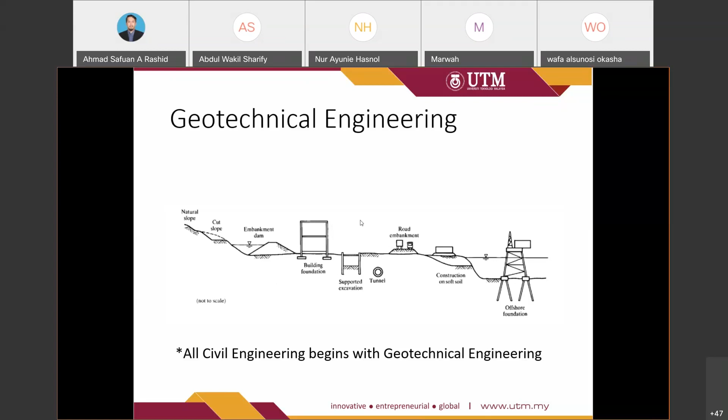So this is a typical geotechnical project, where we are provided with land to construct any structure on top of the ground. So the most important thing as a geotechnical engineer is we need to get all the related information, especially on the soil properties. So what do we need? For example, strength, stiffness, and also consolidation.

So in order to get all this information, we carry out site investigation at the site, and then we bring all the samples, either undisturbed or disturbed, to the lab and conduct all the required tests. From there we gain all the soil properties, and from the soil properties we can carry out the design.

So now, for example, if the problem is very complicated,

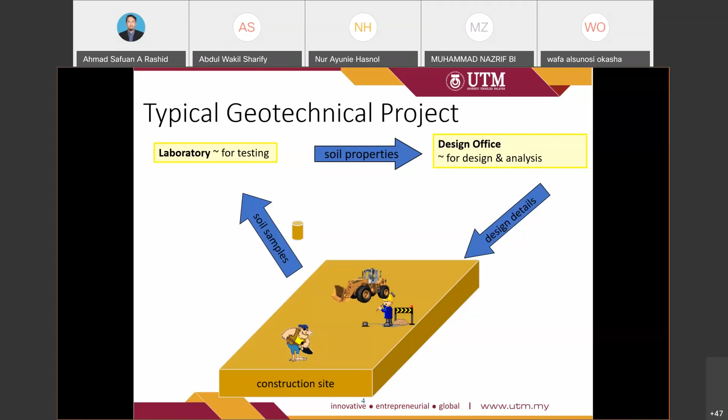So for a geotechnical engineer or a structural engineer, these are the two most important things that should be considered. We need to make sure that in our design, the building or structure is able to provide good serviceability and also prevent any failure. For serviceability, we may discuss the SLS, serviceability limit state approach, while for failure, normally we discuss the ultimate limit state approach.

So for example, logically, if we satisfy the ULS, definitely we may prevent the soil from collapsing. However, if we do not satisfy the SLS, most probably there will be no problems with the structure in terms of failure, but we will not feel comfortable to stay or live inside a building that has a lot of cracks. I guess nobody in the world will buy a new house with a lot of cracks.

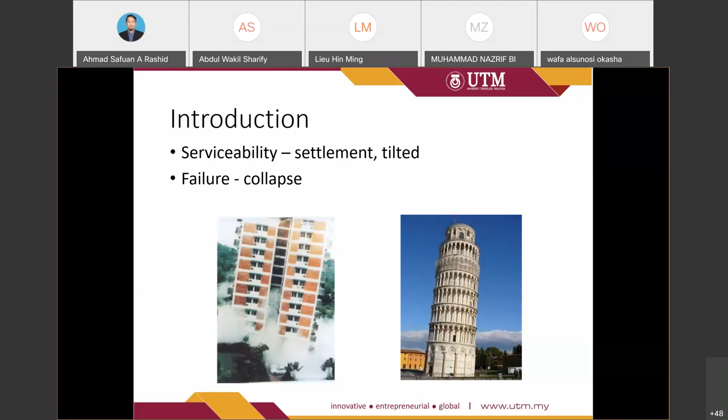So traditional soil mechanics and geotechnical engineering design was predominantly concerned with soil strength and stiffness, so that the design engineer could define the failure state of the soil or control excessive deformations of the soil structure. Strength we can get, for example, if we carry out a triaxial test, or unconfined compressive strength as a simple one, so we can get the strength of the material.

In order to get the stiffness, we may divide the strength by the strain. That means what is the allowable strain before the soil starts to fail. So that is related to stiffness. So we need to make sure that the movement should not be greater than the allowable strain. Okay, so for excessive deformations,

Is it on? What does it mean? Who was that, miss? Is it on? Nothing. Okay. Why can't you see my slide? Assalamu alaikum, Professor. Actually, we can see the slides, but the first time I joined I could not hear the sound, so I had to disconnect and join again. Okay. So now Mr. Rian Lim is texting that he cannot hear the sound, so I told him to just rejoin the meeting. Okay, you need to rejoin. Might be that will help. Actually, I'm recording this lecture, so after the class I will give the recorded file.

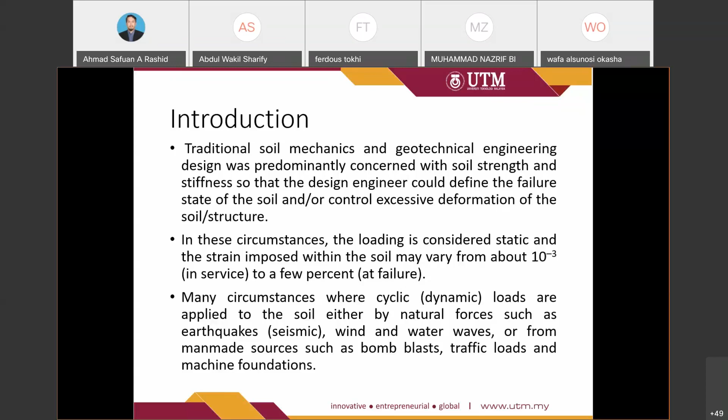So the type of dynamic loading in soil or the foundation of a structure depends on the nature of the source producing it. The dynamic loads vary in their magnitude, direction, or position with time. So we need to identify the value, the magnitude, the direction, and at what time it normally arrives.

So there are several types of dynamic loads. We call one periodic load. It's a special type of load that varies in magnitude with time and repeats itself at regular intervals. For example, operation of reciprocating or rotary machines. So this is related to a machine, where they provide a vibration at regular intervals.

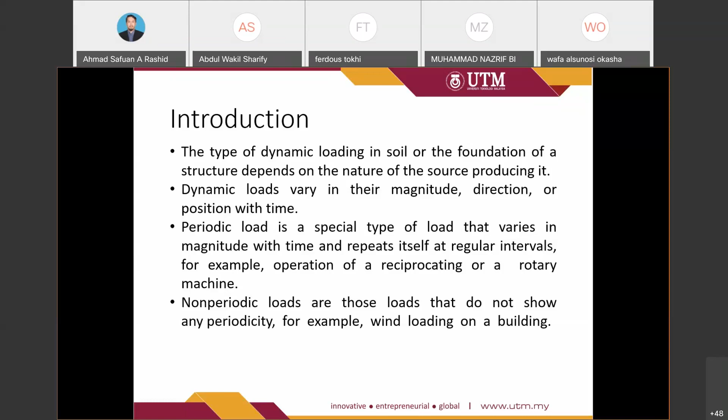Okay, non-periodic loads are those loads that do not show any periodicity. For example, wind loading on a building. They still provide what we call dynamic loading, but it's not very sure when the load will come, the frequency of the loads.

So we have deterministic loads. Those loads can be specified as a definite function of time, irrespective of whether the time variation is regular or irregular. For example, the harmonic load imposed by unbalanced rotating machines. So this is due to problems with machines where they produce harmonic loads.

Okay, non-deterministic loads are those loads that cannot be described as a definite function of time because of their inherent uncertainty in magnitude and form of variation with time. For example, earthquake. We cannot determine accurately when this type of load will come. The seismologists can estimate, but they cannot predict accurately.

So cyclic loads are those loads which exhibit a degree of regularity both in magnitude and frequency. Okay. So it's more related to how the loads have a tendency to

There is no sound? Anyone have a problem with the sound? Hello? I'm okay. Where do you stay? Ode, is Ode your name? Yeah, because I give the lecture from UTM, so I guess there will be no problem in terms of internet connection from my room. Okay. Maybe you have a problem with your own internet connection.

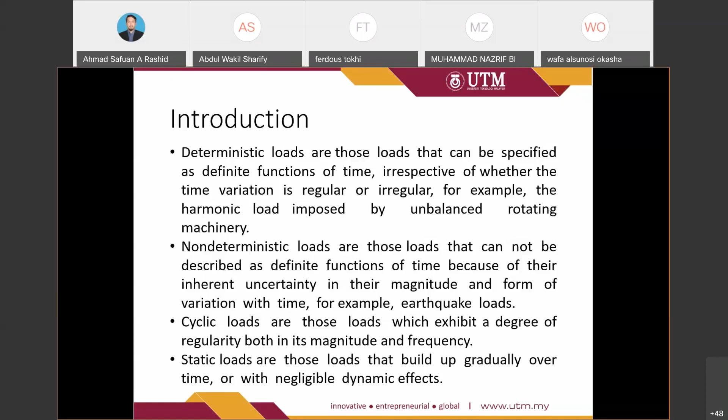Okay, so this is an example of types of dynamic loads. The first one is a low speed rotary machine. So they have a certain cycle there. They show a sinusoidal type. For example, for the left side, for the right side.

Okay, here they show sinusoidal patterns. And the thing we have here is a single impact of a hammer and vertical acceleration due to pile driving. So this is the effect of pile driving during pile installations. They drop a hammer and then the hammer hits the top, the pile cap, the top of the pile, the pile shoe. So then they produce this kind of

signal result. And the last one is from the accelerogram of an earthquake, which they measure in gravity, which shows the pattern of the earthquake within 26 seconds. So it means that all the cyclic loads are related to cyclic loading under a certain period of time. Compared to static, it doesn't have any cycle. Either it can gradually increase with time, or it will maintain a certain value.

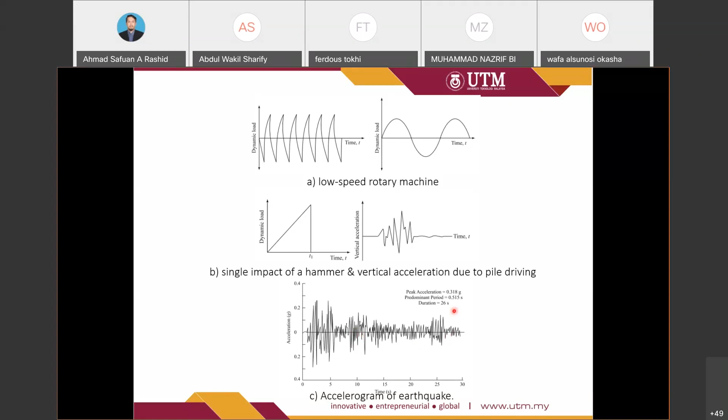So the magnitudes of these dynamic loads are generally much smaller than most static loads and generate strain within the soil as low as 10 to the power of negative 6. It's a very small strain. And in terms of the magnitudes, we do not compare to the earthquake. We just compare, for example, from a machine. So it's less than the normal static.

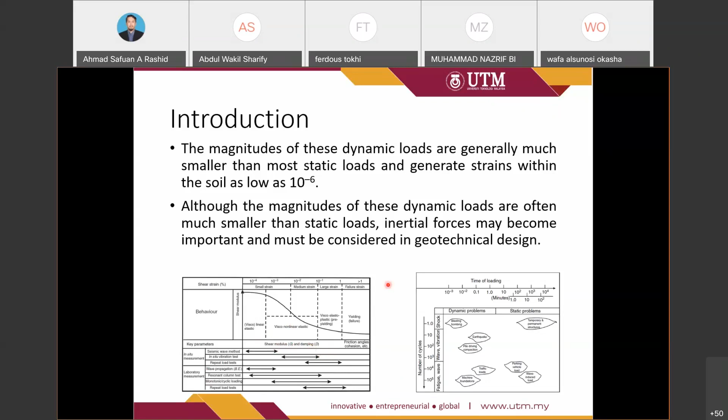So a simple analogy. For example, if you are a passenger in a car and suddenly the driver brakes the car suddenly, you may feel that you are moving forwards. So that is an example of inertia. Newton's first law says that objects do not accelerate spontaneously. This property of matter which causes objects to resist acceleration has been named inertia. So Newton's first law is often called the law of inertia. So that is the definition of inertia.

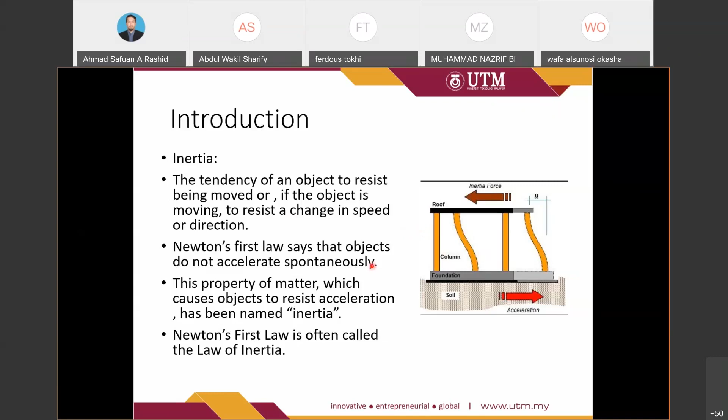Most civil engineering structures involve some type of structural element in direct contact with the ground. When we design a building, the building itself is called the superstructure, while beneath the ground there is a substructure, normally called the foundation.

When an external force such as an earthquake acts on this system, the structural displacement and the ground displacement are dependent on each other. Even though the foundation structure and the supporting soil are two different physical entities, they form a system, or in terms of the mechanics of behavior, one component influences the behavior of the other, the end product being the result of this mutual interaction between the two.

When an earthquake event happens, the ground starts to displace first, and this movement causes an interaction between the ground and the structure. This is the essence of soil-structure interaction. Due to the movement of the ground from the earthquake, this movement starts to shake or vibrate the building, and so there is an interaction between soil and structure.

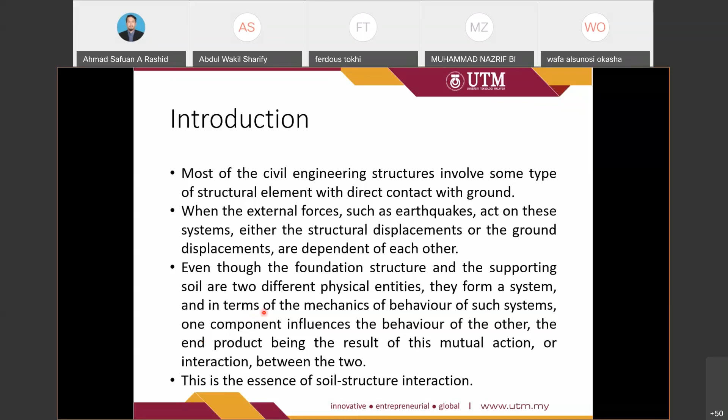The process in which the response of the soil influences the motion of the structure, and the motion of the structure influences the response of the soil, is termed soil-structure interaction.

Conventional structure design methods neglect SSI effects. Neglecting SSI is reasonable for light structures on relatively stiff soil, such as low-rise buildings and simple rigid retaining walls. In common conventional design, we normally don't include the SSI approach or SSI effects, especially when designing light structures or low-rise buildings. They also mention stiff soil - for example, if it's stiff or dense soil, there are no problems designing without considering SSI effects.

The effect of SSI, however, becomes prominent for heavy structures resting on relatively soft soil, for example nuclear power plants, high-rise buildings, and elevated highways on soft soil. There are two things here: first, if the structure is very big or high and sensitive, such as a nuclear power plant, we are not allowed to have any cracks in the structure, because it may lead to nuclear contamination problems.

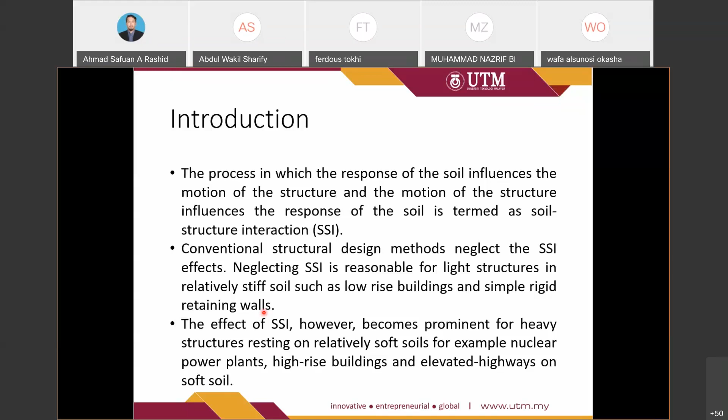Damage sustained in recent earthquakes, such as the 1995 Kobe earthquake, has also highlighted that the seismic behavior of a structure is highly influenced not only by the response of the superstructure but also by the response of the foundation and the ground as well.

Based on this, during the 1995 Kobe earthquake, they noticed the importance of integrating the interaction between soil and structure in the design, in order to reduce building failure. Modern seismic design codes, such as the Standard Specification for Concrete Structures, Seismic Performance Verification JSCE 2005, stipulate that the response analysis should be conducted by taking into consideration the whole structure system, including superstructure, foundation and ground.

So they came to a wise conclusion, proposing a seismic design code which considers these SSI effects.

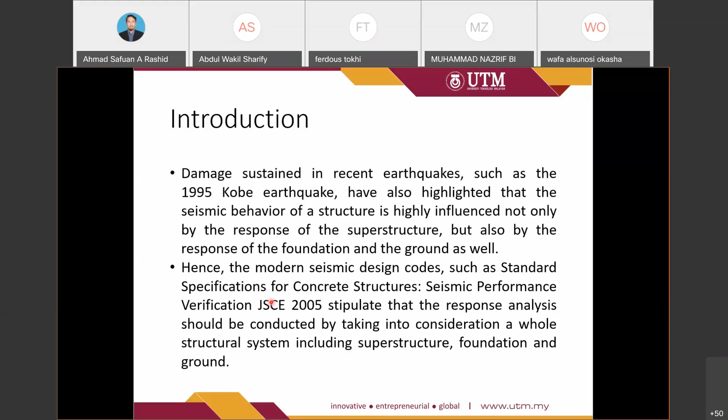The process in which the response of the soil influences the motion of the structure, and the motion of the structure influences the response of the soil, is termed SSI, soil structure interaction.

Stiffness relates increment of stress to increment of strain. A knowledge of soil stiffness is required to calculate ground movement and to obtain solutions to problems of soil structure interaction, such as loads on retaining walls.

I guess most of you have experience using a commercial software, especially for geotechnics, like Plaxis. We need to include all the information on strength and stiffness when we run any analysis. If you choose to run a seismic analysis, we need to include the shear modulus or damping ratio values in the design.

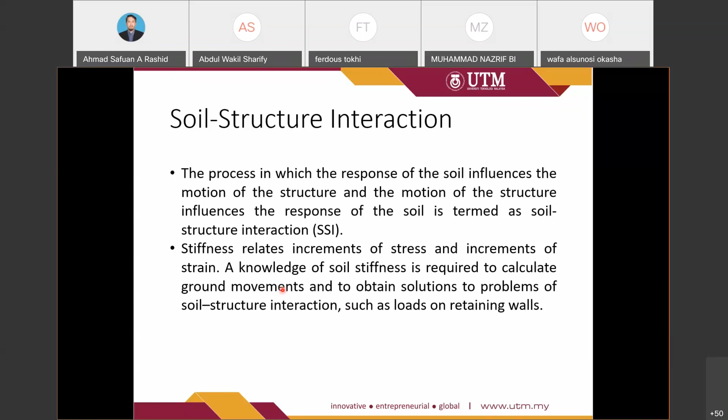That's why when I did my PhD in the UK, there was one guy from Thailand who studied the effect of shredded tire to reduce the effect from vibration. They mix the soil or have a layer of shredded tire, which acts as a damping system.

For example, if we treat the soil well, the magnitude of the wave will be reduced before it starts to transmit to the structure. This means that if we treat the soil well, we could reduce the cost for the foundation. This phenomenon is called dynamic soil structure interaction, and is recognized as being very important for seismic design of structures.

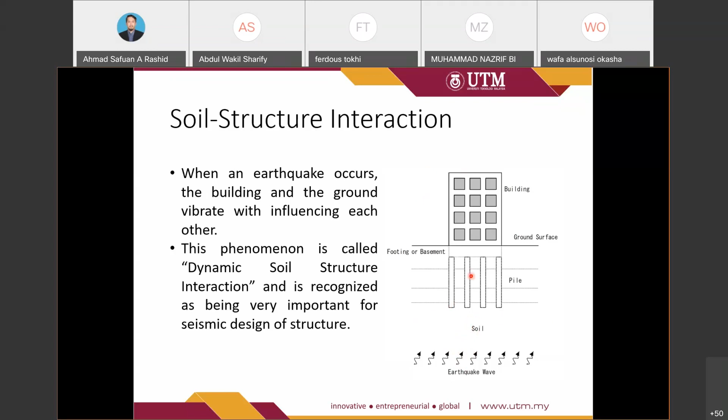When we discuss soil structure interaction, the most important structure is the substructure itself, because the source of the vibration is from the soil, which transmits to the substructure, and later goes up to the main building or superstructure.

The role of the foundation under static or normal conditions is supporting the dead weight and the live load of the building, transmitting this load to the ground - from the slab to the beam, to the column, and to the foundation. That is the role of the foundation.

During an earthquake, the foundation transmits the ground motion to the building, and bears the building vibration, transmitting it back to the ground. It means that when the source of the earthquake is beneath the foundation, it transmits the ground motion to the building, then bears the building vibration and transmits it back.

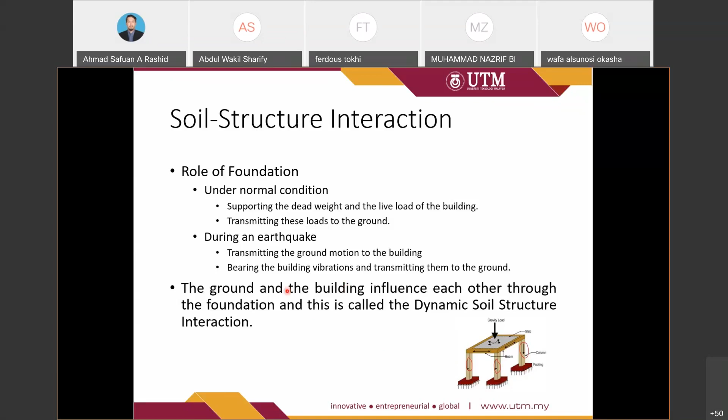Because the earthquake is a wave, or a cyclic loading, it can transmit from the ground to the top of the building via the foundation. The ground and the building influence each other through the foundation, and this is called dynamic soil structure interaction.

The degree of influence of SSI on the response of a building depends on the stiffness of the ground, which is related to the property of the ground itself. For example, a loose sand compared to a dense sand - the loose sand is definitely weaker compared to the dense sand or dense material.

Dynamic characteristics of the building itself, such as natural period and damping factor, also matter for the building and foundation. It depends on its natural period or natural frequency - each structure has its own natural frequency. If the vibration is greater than the natural frequency, there is a potential for the structure to fail. They also have their own damping factor, which can reduce the effect from earthquake vibration. If you have a chance, you can go to Japan.

You can go to Japan and see a building with a lot of what we call a damping system. I used to visit Nagoya, for example, Hokkaido, and I saw a lot of damping systems built into their buildings to resist or reduce the effect from the earthquake.

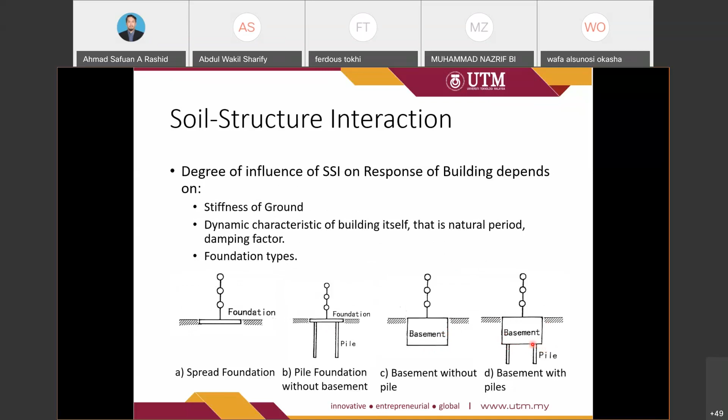And the last one, through the basement surface and the pile, this basement surface and also the pile, so this is a combination of pile and basement. So this is the contact between the ground and the structure.

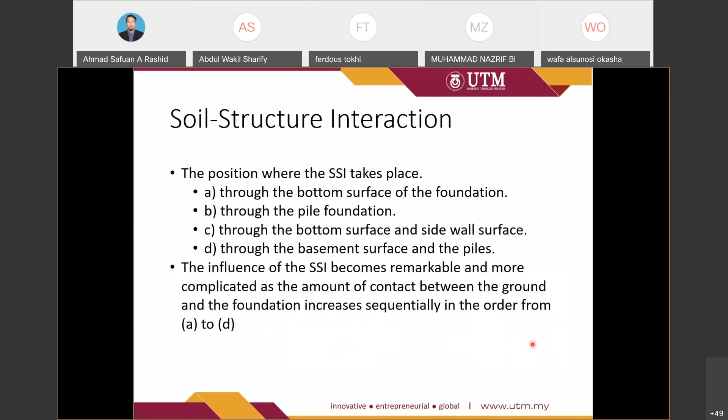The influence of SSI becomes remarkable and more complicated as the amount of contact between the ground and the foundation increases, sequentially in order from A to D. So A is less complicated and D is the most complicated, in terms of analysis or calculations.

So this is an example where a building experiences an earthquake or vibration from the earthquake. Here we have an earthquake fault. So the interaction between ground and structure happens when the seismic wave, denoted as E naught, generated by the earthquake fault, reaches the bottom of the foundation.

When it reaches the bottom of the foundation, it divides into two types: the wave E1 entering into the building, and the wave F0 being reflected back into the ground. So there will be E1 and F0. The wave E1 is called the transmission wave, while the wave F0 is called the reflection wave.

So how do we measure this kind of wave? From the earthquake fault, we can use a seismograph. For the E type, we can use the accelerometer.

For example, if you plan to monitor the health of a building, there's a topic called structure health monitoring. So you want to measure the health of the building, so you may include sensors, for example install an accelerometer on the building, and on the ground install a seismograph, so you can measure what will be the cost after the earthquake or any vibration effect.

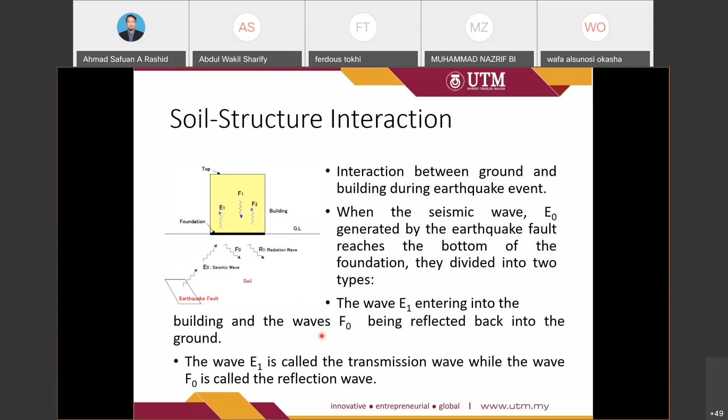Then the transmission wave entering into the building travels towards the top of the building, subjecting the building to vibration. So E1 will move up to the top, and then it will reflect as F1, reflecting at the top and traveling back down to the foundation.

Here a crucial phenomenon occurs for consideration of the SSI. When it moves up to the top, it goes down again, so there are two types of effect, which are F2 and R1. When the wave that is reflected at the top of the building, F1, traveling downward, reaches the foundation, part of it is transmitted into the ground, while the rest is reflected back again and starts to move upward through the building.

This phenomenon will continue until the magnitude of the wave reduces, reducing after a certain number of cycles. The former wave escaping into the ground is called the radiation wave, which is R1.

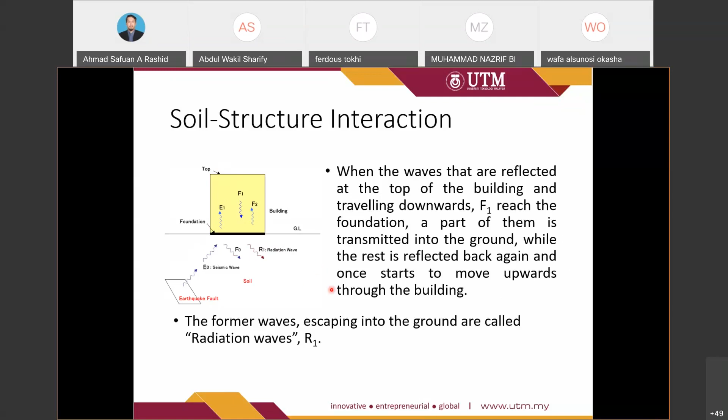Okay, so when the amount of this radiation wave is small, the seismic wave once transmitted into the building and the building continues to vibrate for a long time, the apparent vibration condition becomes the same as the small damping of the building. Okay, the damping caused by the escape of the seismic wave, which has been transmitted into the building, into the ground, is called radiation damping. Okay.

So it means that the building also has a damping system. Okay. So if we can improve the damping system in the building, we can reduce the number of the vibrations. Okay.

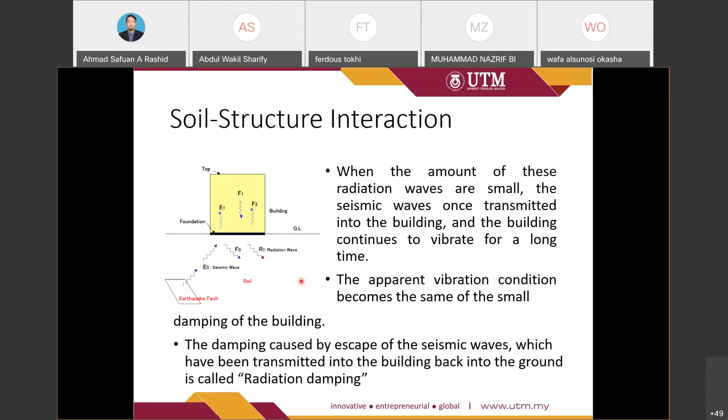So when the building foundation is forced to vibrate vertically, a stress called contact earth pressure is caused at the boundary between the bottom surface of the foundation and the ground. Okay. So this is related to the contact earth pressure. There will be three types of contact earth pressure; the distribution of this contact earth pressure over the bottom surface of the foundation is called the contact earth pressure distribution. Three types of distribution: we have here a rigid foundation, uniform soil classification, and parabolic distribution, where non-linearity is observed. Okay.

So it depends on the type of the material, and also the type of the loading. Okay. So for example, if rigid, normally we discuss what we call normal or static loads. Okay. So we have uniform loads. And then we have a parabolic distribution, which is normally related to a loose material. Okay, so this is the type of the contact earth pressure.

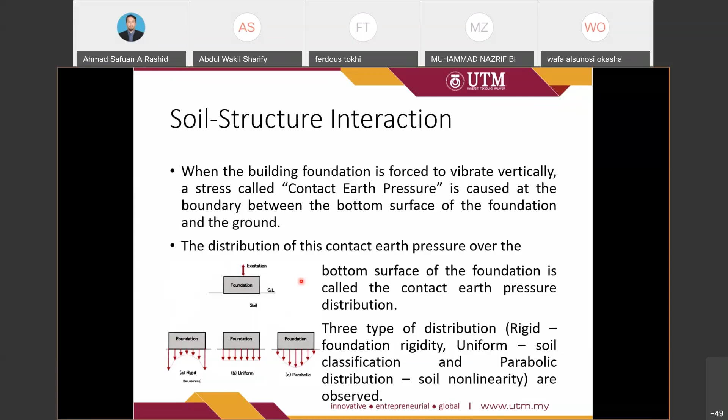Okay, for foundation and substructure solutions with increased complexity, more involved methods of calculating the forces within and displacements of the structure elements are required. The use of more basic approaches that rely heavily on hand calculation or rules of thumb may not be appropriate in such situations, as there may be too many degrees of indeterminacy within the problem, or they may simply be too time consuming to use. Okay, so as a result, the use of finite element models allows the user to create a soil structure model of the whole or part of the problem with relative ease.

Okay, so when I did a reading on this soil dynamics, for example, they still do not have a very comprehensive formula to estimate, for example, the bearing capacity for a shallow foundation, and the author just relies on previous laboratory work in order to calculate, for instance, the bearing capacity for a shallow foundation.

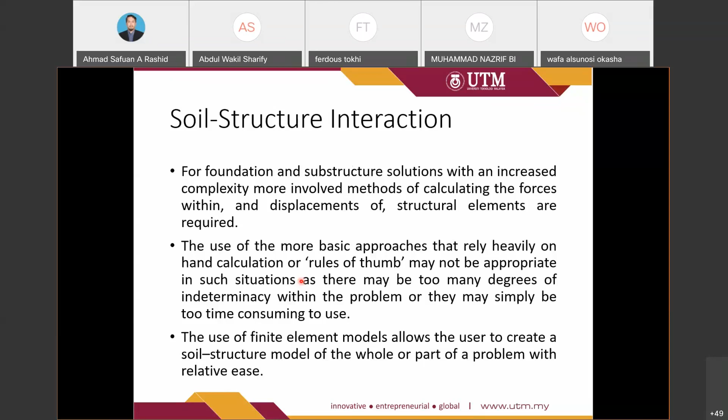Okay. This model can generally then be modified to respond to changes in the design or undertake parametric studies that might otherwise take a great deal of time. So again, when we want to, for example, carry out a parametric study, for example, we want to vary the soil condition or the structure geometry, the author suggested we need to use the finite element method or software.

So soil structure models can also provide us with a means of predicting the impact of one structure on another. Displacement and stress changes can be calculated for different construction phases. Okay. But the important thing is to include what we call the shear modulus and damping values for the soil properties under cyclic loading. Okay.

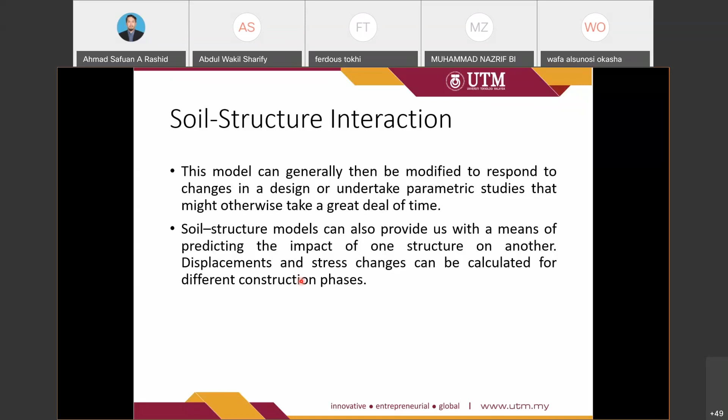Okay. Then we move to wave propagation in soil. So we need to identify what is the pattern or what is the wave that propagates in the soil. Here, I have classified three types of wave which are related to the soil, or the ground itself. For soil, three types of wave are readily encountered and are of importance.

The first two are termed body waves, which are propagated within the soil and comprise the compressional wave and shear wave. So they have two types of wave inside the body of the soil; they call them body waves. So there are two types of wave, which are the P wave and S wave.

So what is the importance of this wave? We can get the value of what we call the shear modulus from either the P wave or S wave, because the shear modulus will be used once we want to carry out the analysis. And at the same time we can determine what we call the layer of the material, the type and condition of the soil, by using this S or P wave.

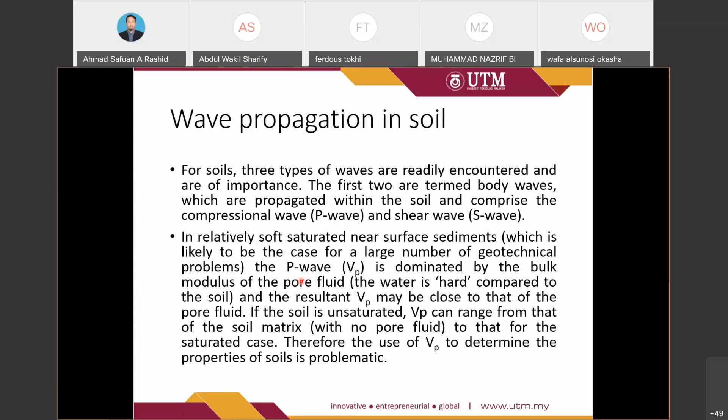However, pore fluid does not carry shear stress, so the velocity of the S wave is only influenced by the soil and not by the pore fluid. It can also be shown that during most dynamic loading events, it is cyclic changes in the shear stress that influence the behavior of the soil. So here we notice that the pore fluid does not carry shear stress, because the water cannot be sheared; the water can be compressed. That's why the water doesn't have any phi value.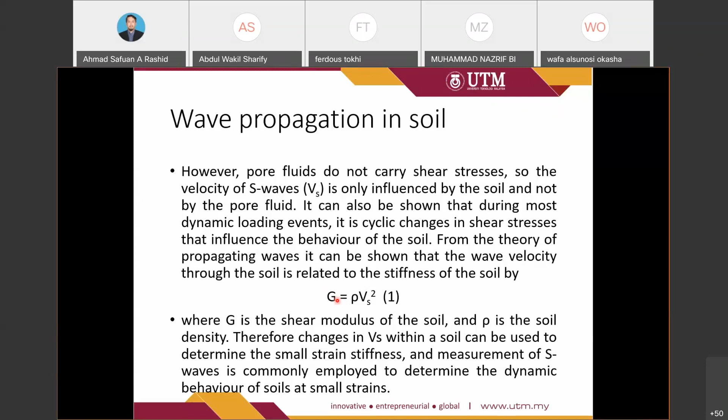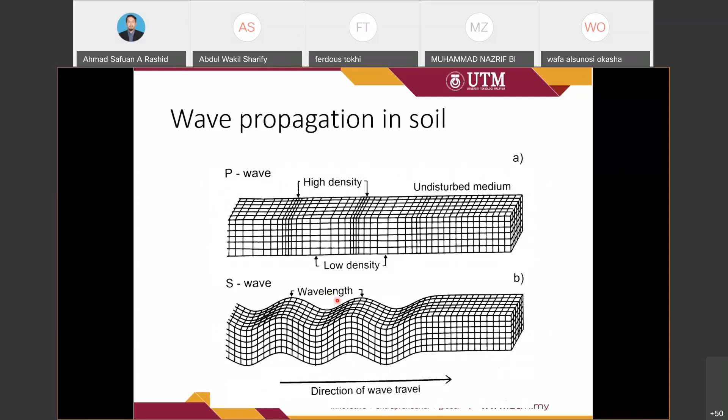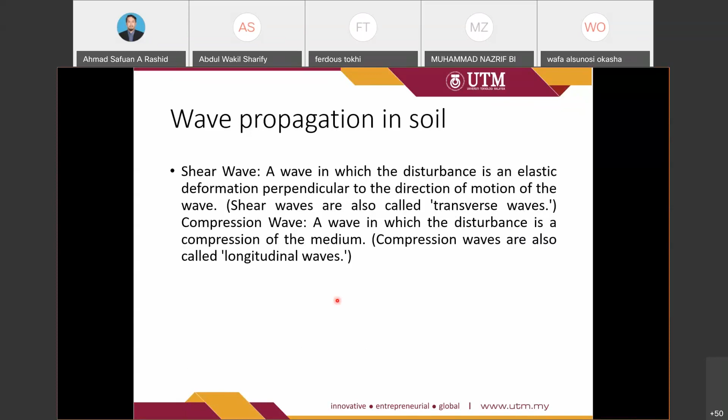So this is the diagram for the P and the S wave, where P represents the compression wave and S is the shear wave. A shear wave is a wave in which the disturbance is an elastic deformation perpendicular to the direction of motion of the wave, and a compressive wave is a wave in which the disturbance is compression of the medium. So the last one, or the third, is the Rayleigh wave.

Okay, which travel along the ground surface. Rayleigh wave measurements have gained in importance in recent years since ground surface measurements can be readily and easily undertaken without the need for any intrusive investigation. So it means that the Rayleigh wave is measured on the ground surface, not inside the ground itself, such as those required for measuring P or S waves.

There is no direct link between the velocity of the Rayleigh wave and the soil stiffness. However, it has been shown that for nearly all values of Poisson's ratio, Vs is approximately equal to 1.09 VR. Okay, so if we obtain the VR, we can get the Vs, then later on calculate the G. Therefore, measurement of Rayleigh waves can give a good determination of shear wave velocity from which G can be derived.

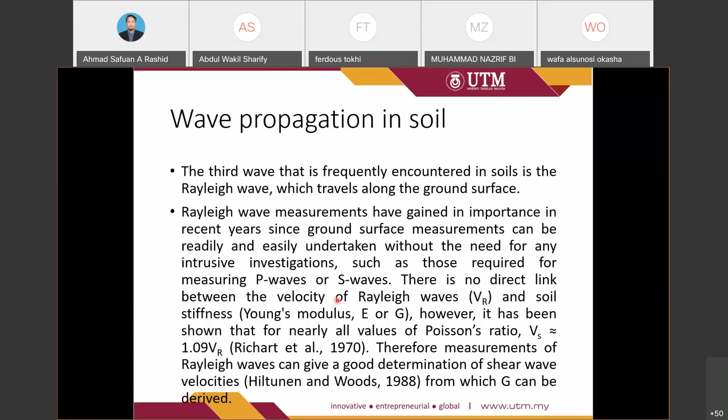Okay, so here we have three types of waves that propagate inside the soil. This is an example of the Rayleigh wave, which is slightly similar to what we call the S wave, but it's only measured on the ground surface. Okay.

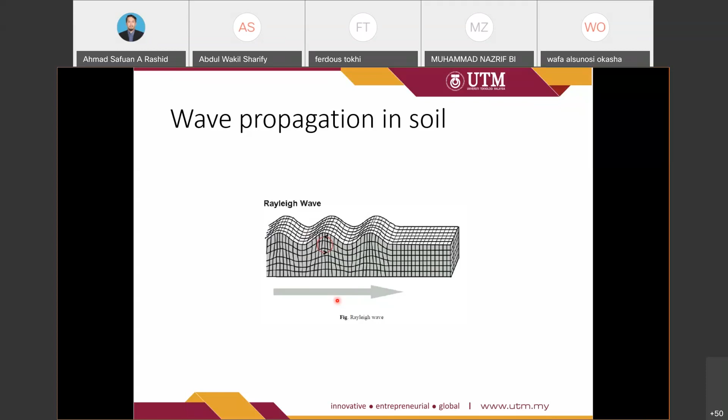Can we have a 5 minute break? Okay, so we continue at 3:30. I guess I only have 30 minutes to finish this slide, and then we try to finish before 4. Okay.

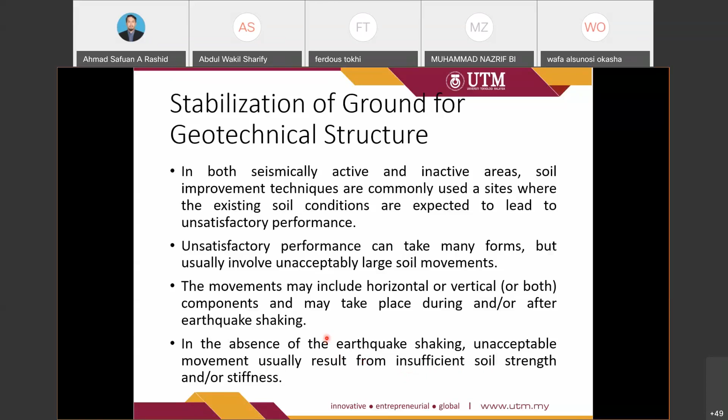So unsatisfactory performance can take many forms, but usually involves unacceptably large soil movement. The movement may include horizontal or vertical or both components and may take place during or after earthquake shaking. In the absence of earthquake shaking, unacceptable movement usually results from insufficient soil strength or stiffness. So strength and stiffness are related, to reduce the shaking from the earthquake. Consequently, most soil improvement techniques were developed to increase the strength and stiffness of the soil deposit.

During the earthquake, the build-up of excess pore pressure can lead to very large deformation. So due to the ground experiencing vibration, the water inside the soil starts going up, and then it can make the condition worse.

For example, a simple analogy: if you pour sugar inside a container, in order to fill more volume you need to shake the bottle, and then the sugar will become more dense, then you can add more sugar on top of the existing sugar. So the same goes for the soil.

So when it experiences shaking, the water inside the soil will start moving out from the soil, and it will mix together and behave as a liquid. So that's why we have the term liquefaction. If you have time, you can Google or look on YouTube. Type soil liquefaction, and you can see there are a lot of events where the soil behaves like water.

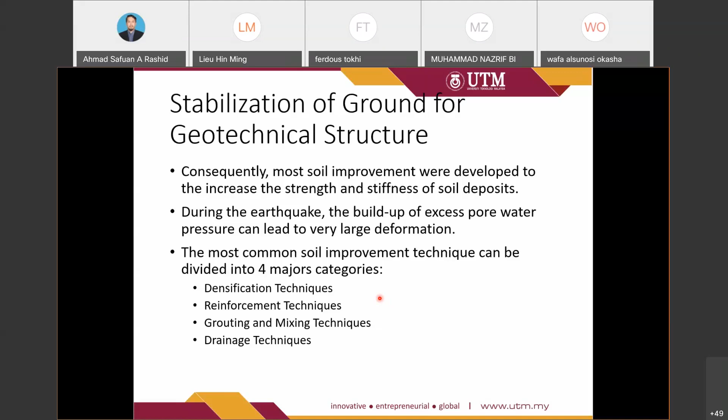Okay, so we go first for the densification technique. The particles that comprise a particular soil can be arranged in many different ways. The strength and stiffness of the soil is higher when the particles are packed in a dense configuration than when they are packed loosely. Okay, so there is what we call a common basic understanding. So the strength and the stiffness is higher when we have a dense material compared to the loose material.

Also, the tendency to generate positive excess pore pressure due to cyclic loading is lower when the soil is dense than when it is loose. Okay? So when the soil is dense, the number of pores is less compared to the soil in a loose condition. So it may not provide a space for the water to move, compared to the loose condition.

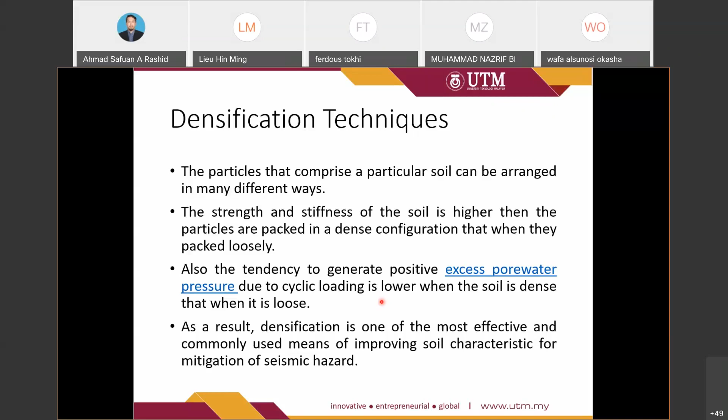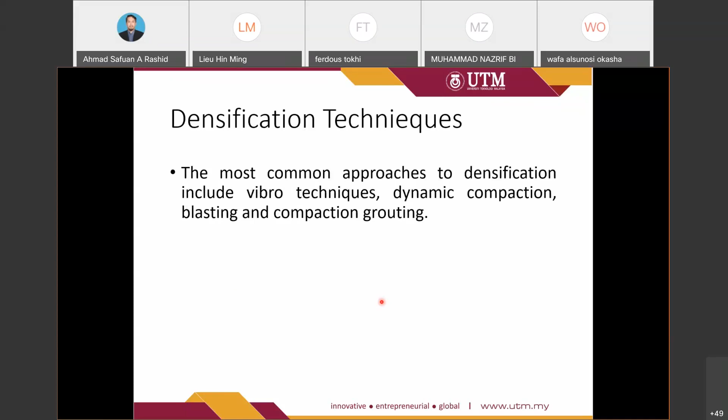As a result, densification is one of the most effective and commonly used means of improving soil characteristics for mitigation of seismic hazard. Okay, so the most common approaches to densification include vibro techniques, dynamic compaction, blasting, and compaction grouting. So these are the common methods used in practice.

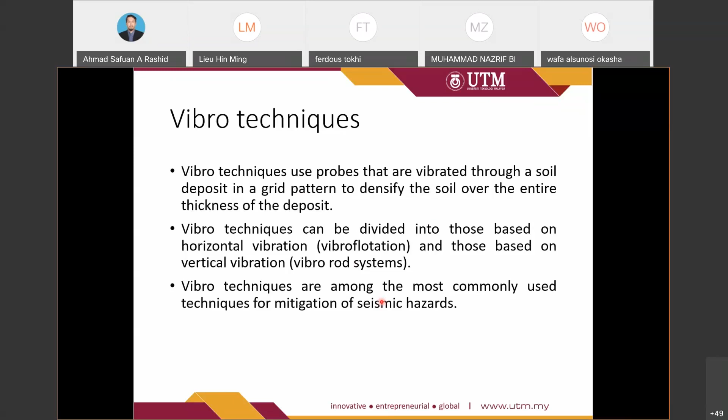So in here we have vibro techniques. Vibro techniques use probes that are vibrated through a soil deposit in a grid pattern to densify the soil over the entire thickness of the deposit. The vibro techniques can be divided into those based on horizontal vibration, which is called vibroflotation, and those based on vertical vibration, which is called vibro rod systems. First is horizontal, second is vertical. Vibro techniques are among the most commonly used techniques for mitigation of the seismic hazard.

Where at the tip of the hammer or the device, they could provide a vibration. Or if you have any experience when some of you did your practical training, during the concreting process, they use a vibrator to make sure that they could overcome the honeycomb problems. So they vibrate inside the soil and it will become dense. So they need to arrange in a grid pattern.

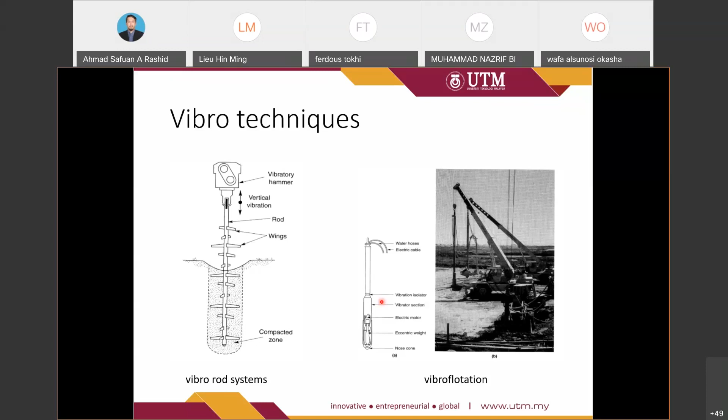Okay, so this is dynamic compaction. As we can see in here, there is a crane, where the crane pulls what we call a steel plate up to 30 meters and releases it down to the ground, where the weight of the plate is about 6 to 30 tons. So they arrange in a grid pattern. Later on they will compact or trim the platform to become flat or smooth.

So dynamic compaction is performed by repeatedly dropping a heavy weight in a grid pattern on the ground surface. So definitely the ground will be compacted well by using this kind of method.

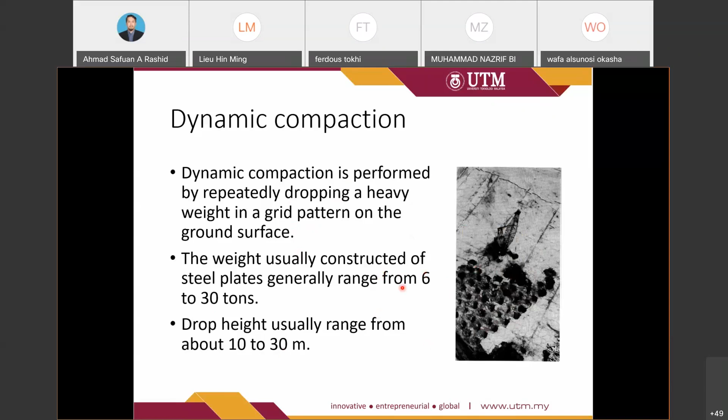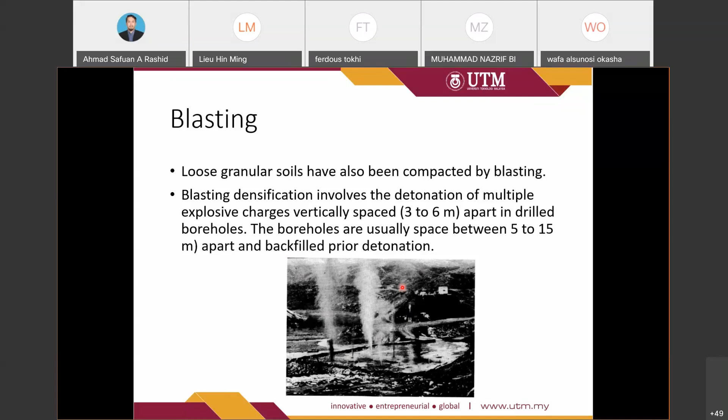So compaction grouting is by injecting what we call cement or any hardening agent which is in a liquid form. So they inject it, this material will start to harden, and then later on it becomes a part of the ground.

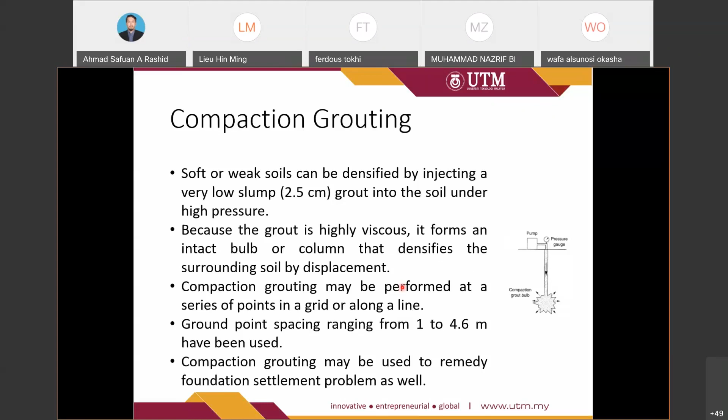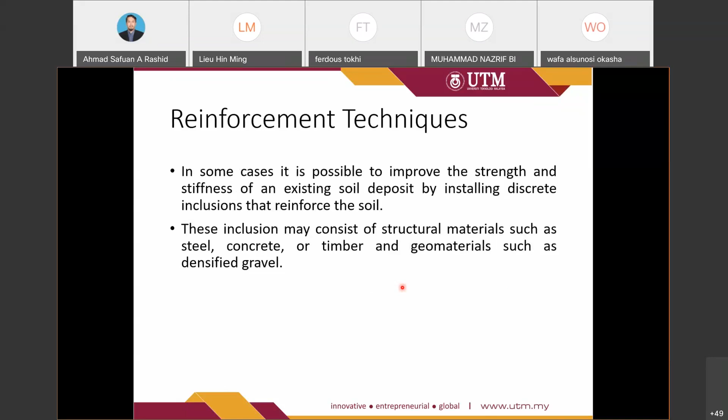So in some cases, it is possible to improve the strength and the stiffness of the existing soil deposit by installing discrete inclusions. So they include something inside the soil, for example by using a piling system, to ensure that the density of the area gets better.

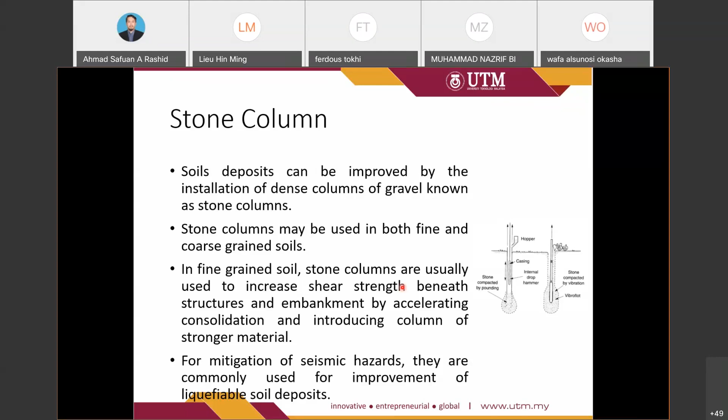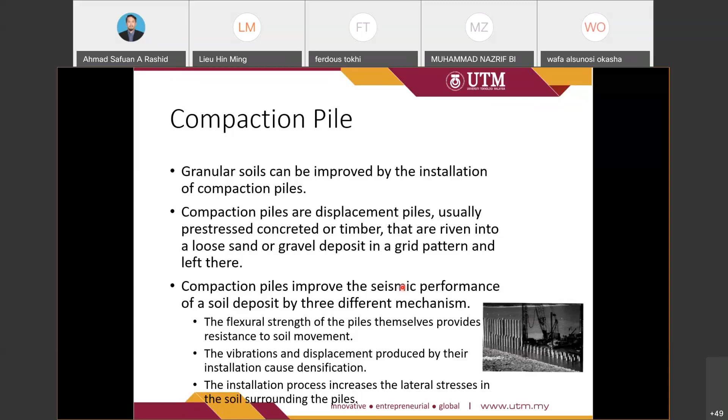During the installation, the vibration due to the installation can cause the soil to become more dense. And the pile structure itself would increase the lateral stress, because a pile with a very long length could provide an additional higher lateral stress.

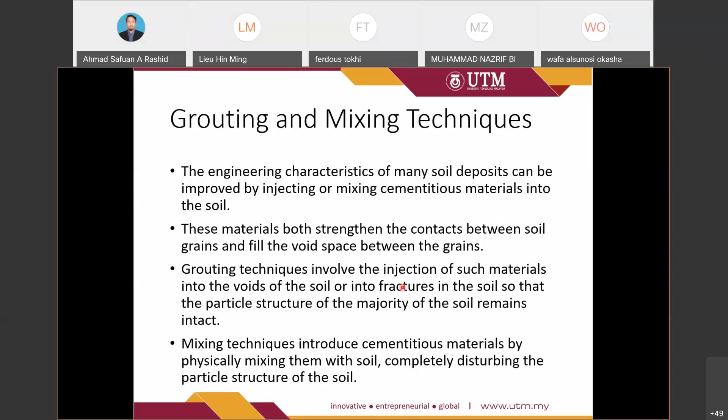The engineering characteristics of many soil deposits can be improved by injecting or mixing cementitious material into the soil. They call this type of method the deep mixing method, where they mix the soil with a stabilization agent, for example cement or lime, under a certain required depth.

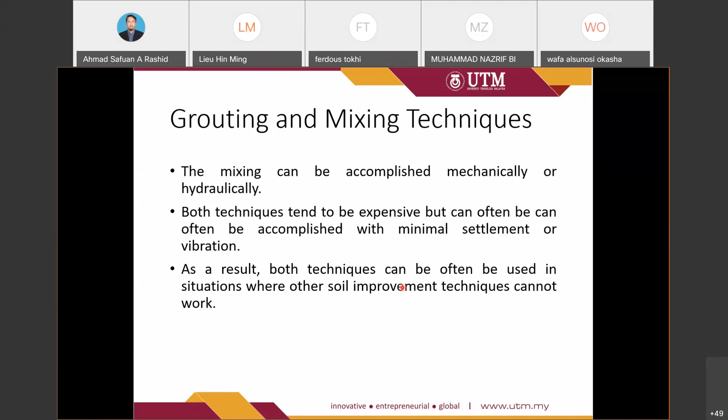So they're using a special mixer, where at the end of the mixer they have a special nozzle which could inject the stabilization agent in either dry or wet condition. So this is a type of grouting, which I have discussed previously. So this is the deep mixing method.

Actually, when I did my PhD, I did my study on this deep mixing method, by using small scale physical modeling instruments.

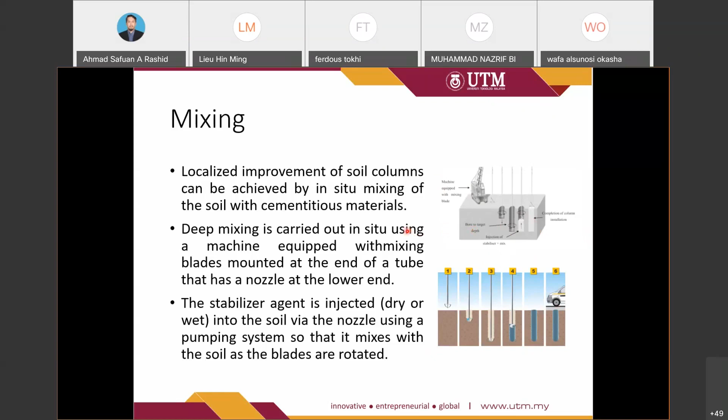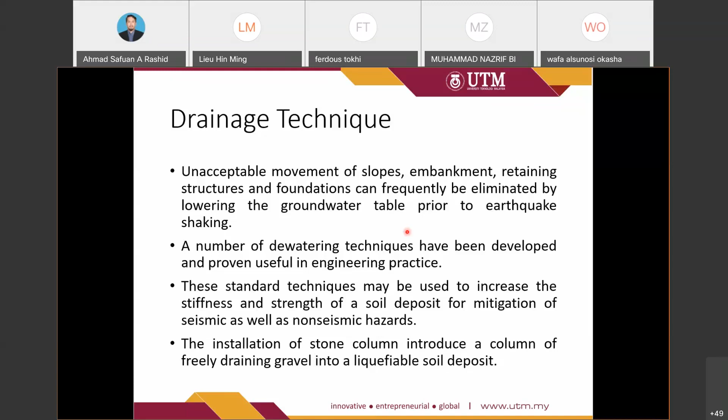So the last one is the drainage technique. As we know, water is the main problem that could reduce the strength and the stiffness of the soil. So in order to increase the stability or the strength of the soil, we need to dewater or pump out the water from the soil. So this is what we call a prefabricated vertical drain. It can accelerate the consolidation process, and it also can make the soil denser.

For example, when they install this kind of prefabricated vertical drain, it should be integrated with the surcharge method. It cannot only rely on the PVD itself, because the PVD only provides a drainage system. So the water is still trapped in the ground without applying a surcharge on top of the ground that has been installed with the PVD.

So the use of the loading is to press the soil, which is to add an additional load that provides pressure. From there, the water will start to move out from the soil through the PVD columns. So it means that we need to have surcharge plus PVD, not only PVD. If we use only PVD, the method is not efficient, or not working well.